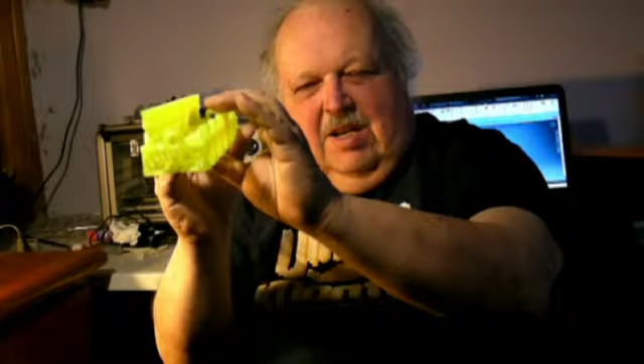And the rack we designed is something like... okay, here's the rack by itself. Let's put the light over here. Like this. It's a double rack because when you print in plastic there's some flex to it. It's designed to be bolted or used with something. That's what the things are on the bottom. And we also print it in one piece together with one of our frame pieces.

You can use it to climb, or when you do this, you reinforce it with something hexagonal, half inch hexagonal, either steel or aluminum, that goes into here and then gets held in place with some brackets. And you still have a little bit of flex here, that's why we didn't design a single rack, but a double rack where there's two pinions that hold from each side, so there is no deflection either way, and you're just going to have a straight pull down, and this will pick up a robot and probably more.

This particular piece is printed out of ABS, and we have quite a few of them that go into our system. Let's look at some of the basic layouts. I'm going to turn this off and move the camera.

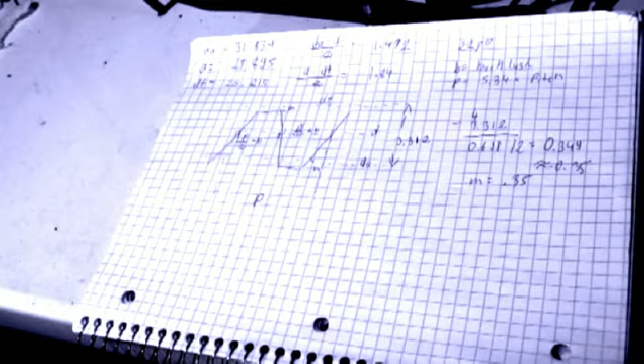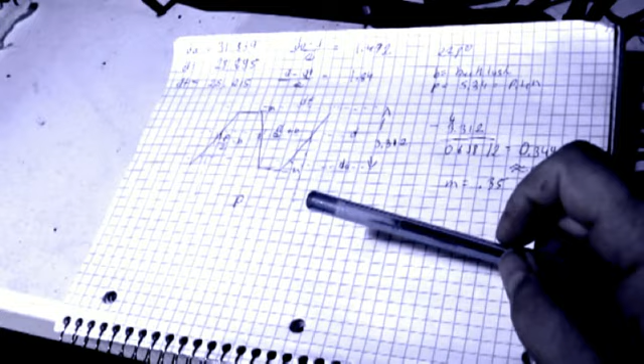Okay, we made a basic sketch here. If you look again at our rack, this whole thing is 267 millimeters long. Everything happens in our system at 26.7 millimeter increments. So for every 53.4 we have 10 teeth, 5 teeth for 26.7. That gives us a pitch length of 5.34 millimeters here.

So as we are working with our printer with the overprint, with a backlash of about 0.1, 0.2 on everything, we have this distance here 0.2 greater than this, so this is 5.34 divided by 2 minus 0.2, so that's 2.67, 2.47, and this is 2.87 to get the 5.34.

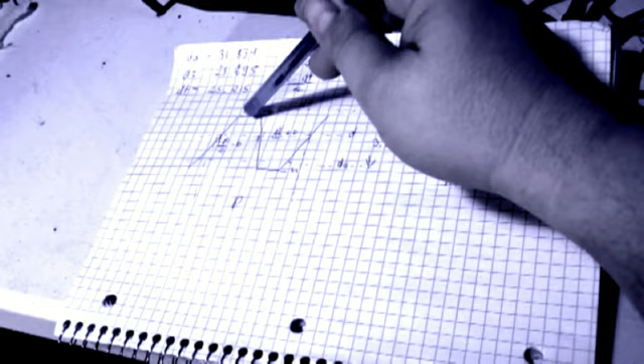Now we have DA, D and DF, which we get from Inventor. We'll show that later. D is the pitch circle, and DA and DF at the bottom and at the top of the teeth. We want to have a little gap here, which we calculated at about 0.35 millimeter, so we don't bottom out with the teeth, so we have nice, smooth and accurate running.

The calculated angle, which we get from Inventor, is 22.8. I'm not going into how to do it all with the math, or this is going to be a 5-hour video. Inventor does a lot for us, and the main intention of this is to go along with the kit. That means we have about 4 millimeters from top to bottom, which we're going to see in our drawing. We're going to have a line here of 22.8, and this here is roughly 0.2 millimeters longer than this.

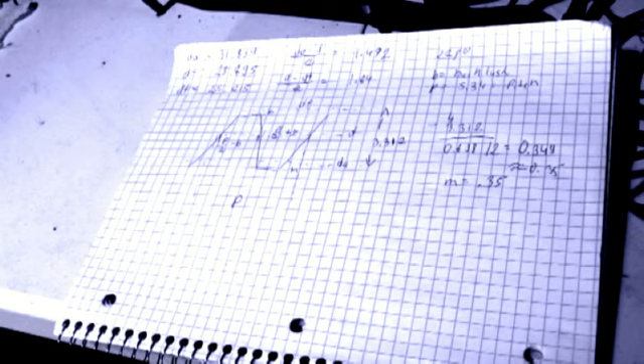Okay, so now let's look where we got the numbers from in Inventor. For those here we took the difference divided by 2 because we work with the radius. There's a 2 on each side, so those are the half sides. So you can go over this math if you want to. We're going to do some more when I edit it together with the video I captured directly from Inventor.

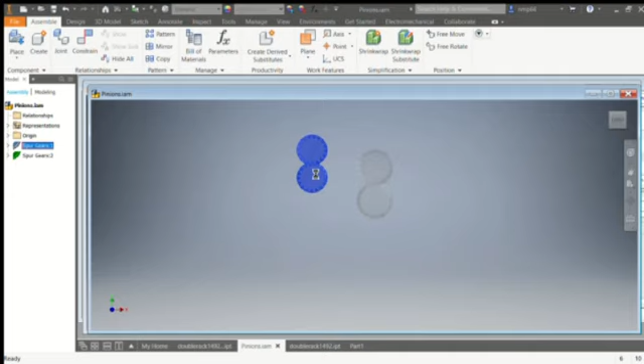Okay, we are in Inventor here, and we started off creating an assembly, I called it Pinions, and I created some gears. We decided on 17 tooth gears. What's going on here? And I decided on a 1-to-1 ratio because that makes it easier.

The center distance is 28.895. If you remember, we had 5.34 for the pitch length. If I multiply this times 17 and divide it by pi, I get the diameter of 28.895 millimeters.

Because we don't want an offset, if I just go in here and calculate the module, put in this center distance and hit calculate, I get 1.5 millimeters because Inventor rounds it up and it gives me a unit correction. That makes things more complicated, so we are not going to do that.

Okay, so you either can use a lot of math to get to it, or you just can play with the module to get the center distance, the desired center distance for this gear. Now if you look here, you have the measurements that we took down, the A, D and the F. The D is the important one, that is the circumference, the pitch circle, which has to match up with the rack. So again, we went

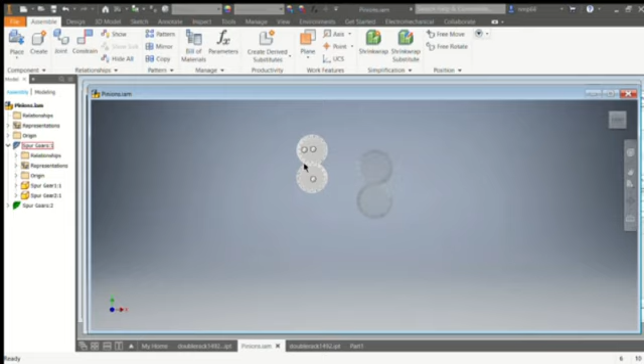So if we make a tooth in Inventor, you would right click on this. I make a gear. You would go to export the tooth shape. Okay, you would decide if it's the pinion or the gear. You would put in a backlash; you probably don't want a backlash, but you need a backlash because you have an overprint in the printer. For our printer, 0.2 is a good backlash. So you put this in here. Inventor does basically pretty much everything for you.

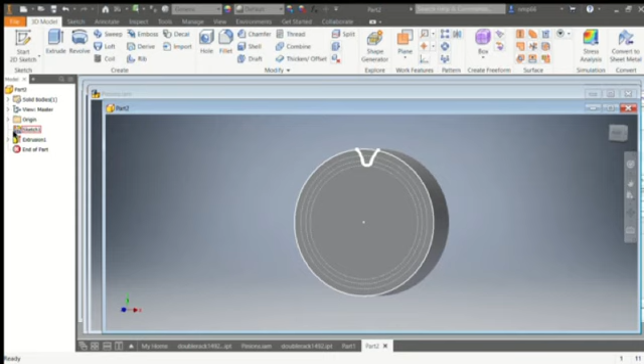Now you have the gear here, so I usually go into the sketch and just write it down and keep the outside diameter just so that I have a node on it, because I'm gonna need it in a circle. I then go and make a coil. I select the... I think I selected everything. Okay, coil. Let's turn this a bit more here.

Okay, then the axis would be the Z-axis, and the coil size would be the diameter, which is 31.839. 31 times pi times tan 60. It's actually the cotangent 30 because we want to have a 30-degree angle, and we gotta go here.

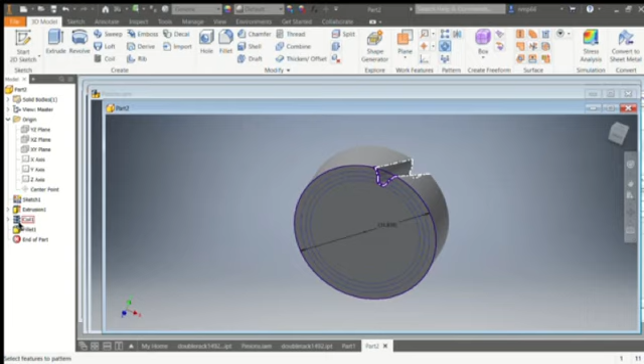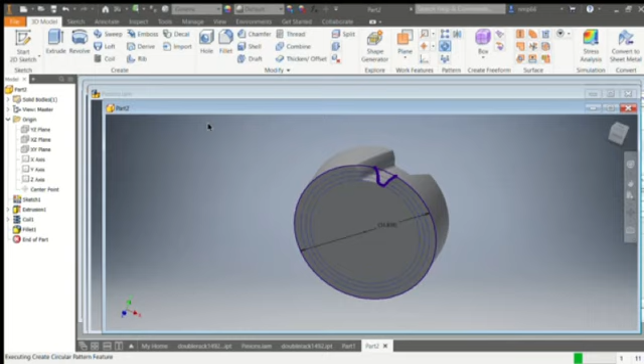So okay, and then you just go to a circular pattern. You select the coil and the fillet. You select the rotation axis, which is again the Z axis, and I think we had 17 teeth on this one here, and I did the typing wrong. Circular pattern, coil, fillet, Z axis, 17. Okay, that's better. And this is how you make a gear.

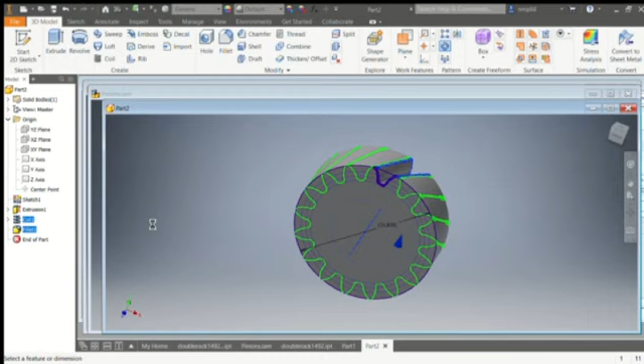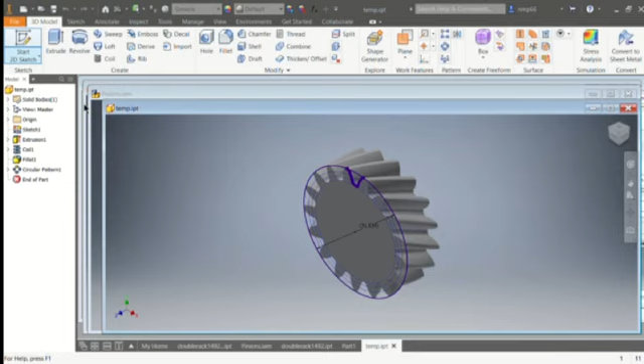Inventor takes a while doing that, and this computer is not so fast. Then to make the double helical gear, you just derive both gears. We can go over that too. Okay, file, save as, let's call it temp. Okay, now to make the finished gear, you just would make another new metric part, because we're printing, everything's got to be in millimeters. You go derive temp, okay,

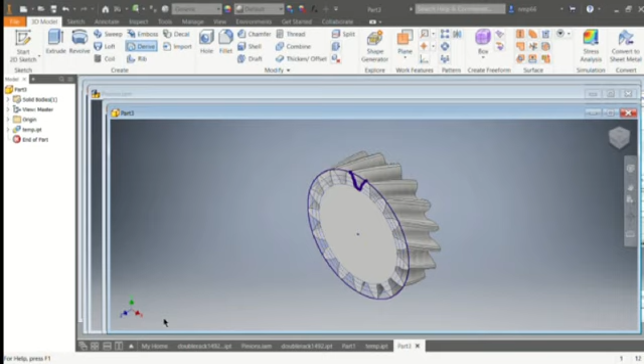and you derive it again. And you mirror it, and there you have your herringbone gear, and now you just combine those two, and you are ready to put some holes or something into this.

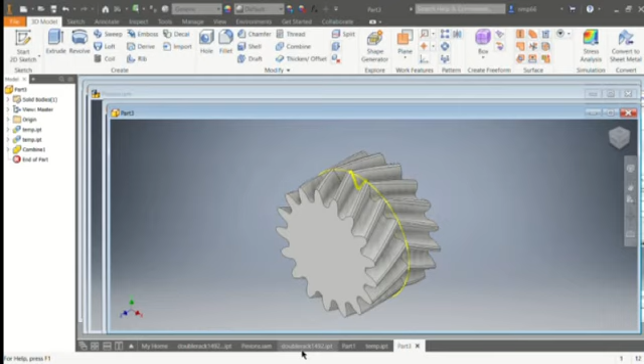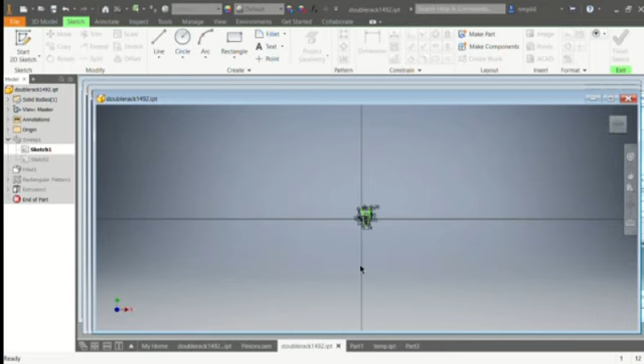Okay, so now let's look at the rack, which is this rack here. It's a little cumbersome and time consuming to draw, so that's why I'm just going to go with this. You draw a sketch, and you draw one tooth. We have the other tooth the opposite. Those are the measurements we just went over before. You have the 4 millimeters from top to top. You have the 6 millimeters here because we space them apart by 2 millimeters. You have again 4 millimeters from here to here.

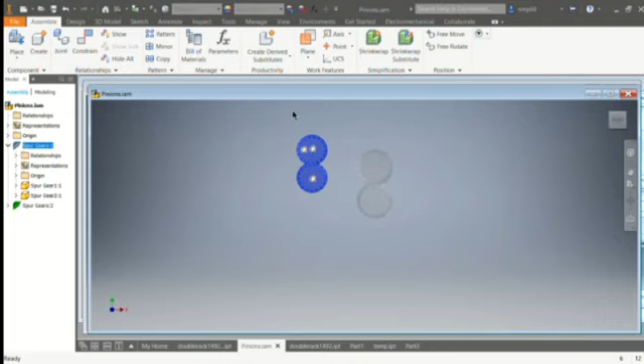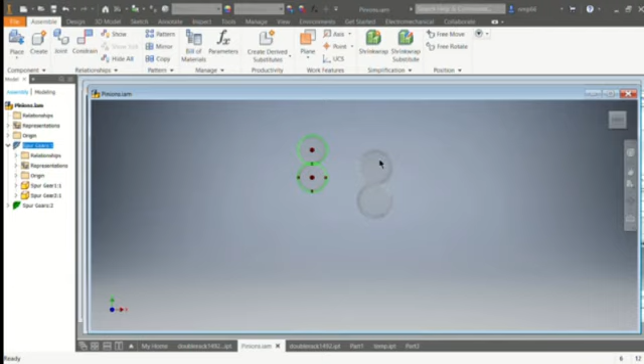You have the 22.8 degrees. If you remember, we looked at this here. It gives us the 22.7959, which is 22.8 degrees, which is the tangential pressure angle, the derived value here for this. So we are using this on the rack.

That's 22.8 degrees here, and this valley is bigger. That's why those up here are smaller than those down here, to take care of our overprint, because when we print, when it squishes the layers together, it pushes out a little bit here, and it's also pushing out a little bit here. This side here is this side here, and this side here is this side here. It's just on the other side.

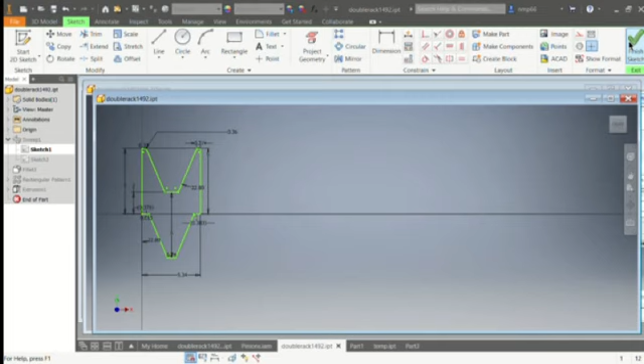So then after we basically draw this out based on the little freehand sketch that I showed earlier, we then on a different level draw our line.

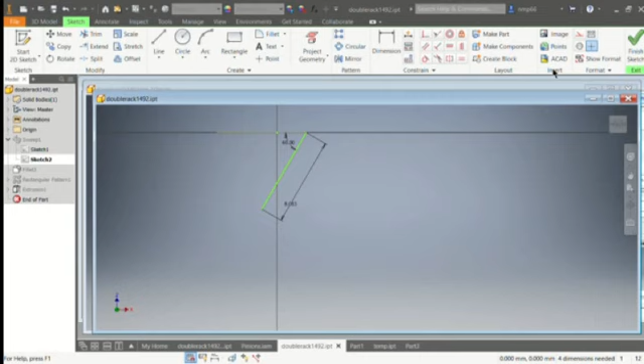We calculate using Pythagoras how long this line has to be for the length of our gear, which in this case comes out to 8.083. We want to have a 30-degree angle here, and then a 60-degree here, because this is a 30, 60, 90 triangle. Imagine a line here and here, and we start now.

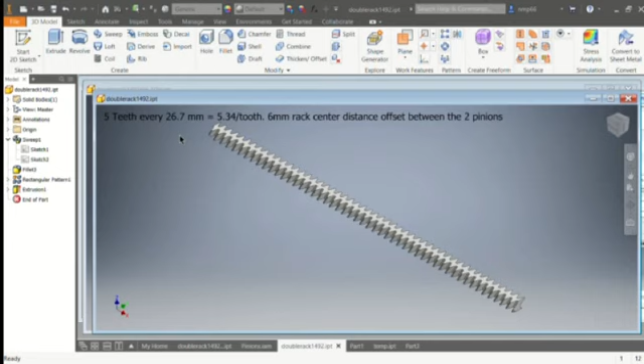We can make a sweep. If you look at the parameters of the sweep here, it's just a standard sweep which selects those two sketches, and we just create a sweep. Okay. Next thing is we are placing a fillet

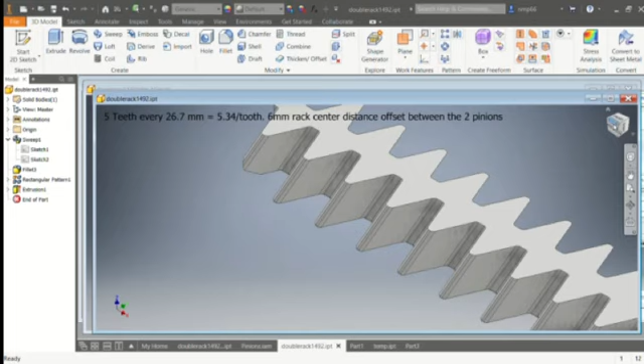on the side, so that at the end we don't have any sharp corners we need to clean up. This fillet is a very small fillet because that's all we can do. It's just here for the purpose of taking care of the overprint of the printer. If we would work with metal, we wouldn't need one. If we work with a printer, we have to make some adjustments based on the printer.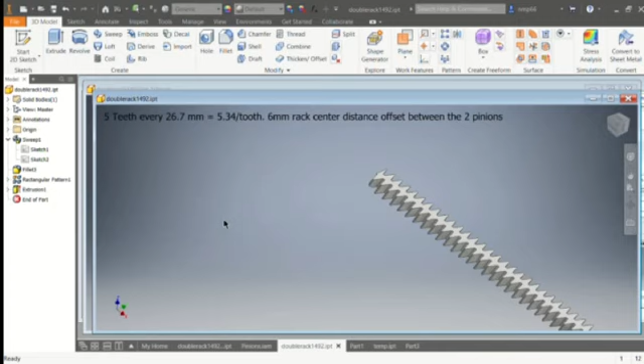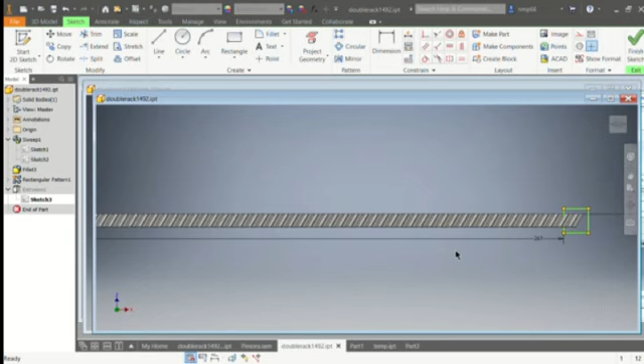So now that we have those, we then make a rectangular pattern. We made 52 at 5.34 millimeter spacing, and we are getting this whole line, and then the last extrusion we do is we cut off the ends to cut it down to the length that we want, so if you look, this one here is cut right at the beginning when it goes up,

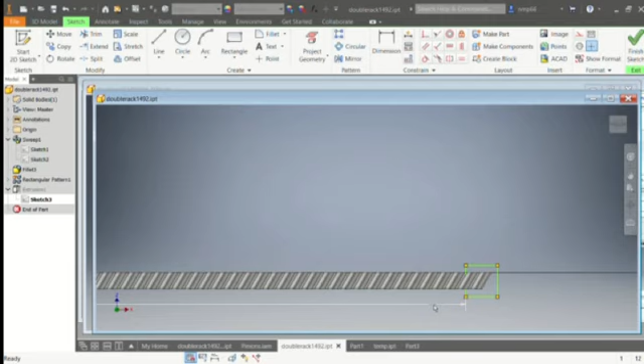and this line here is at the same position here, and here you have the 267 millimeters, which we want: 10 times 26.7 millimeters, what our bracket that we mount to is going to be. We cut those pieces off and we wind up with this piece.

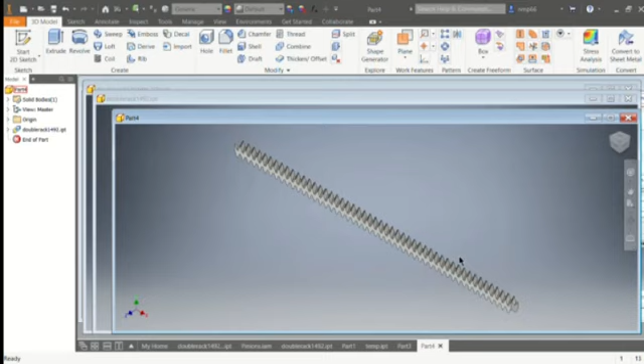Okay, now I create a new part, and again, like with the gears, I derive the double rack 1492. Then I derive it again, and I mirror it, and I combine.

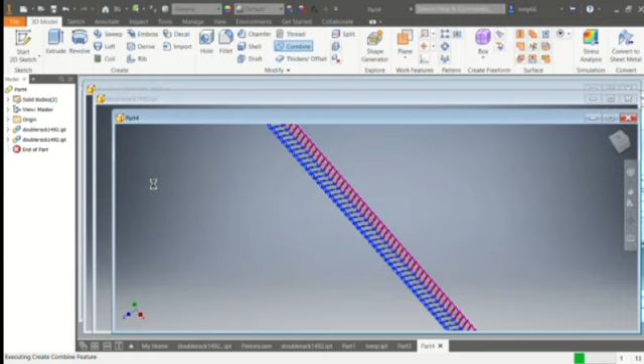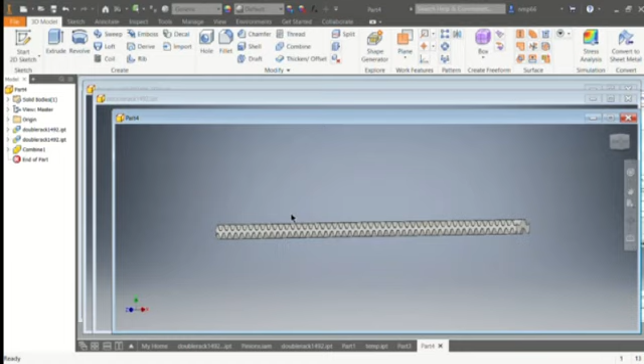So now I have my herringbone, double helical, or whatever you want to call it, double rack, and the gears are offset. That means if we want them on the same axle pressing together, it only works with odd numbered teeth. That's why we have a 17 tooth gear. So we just cancel. No, we don't want to save that. We already have that. Let's close this.

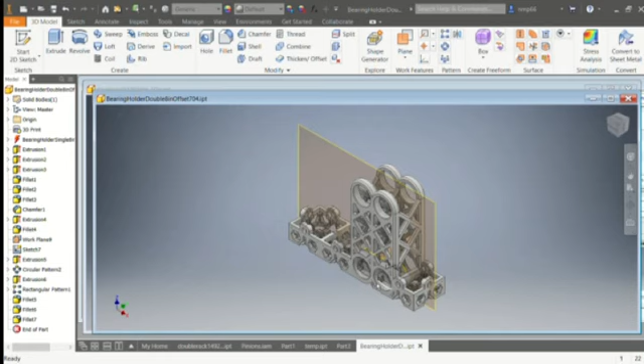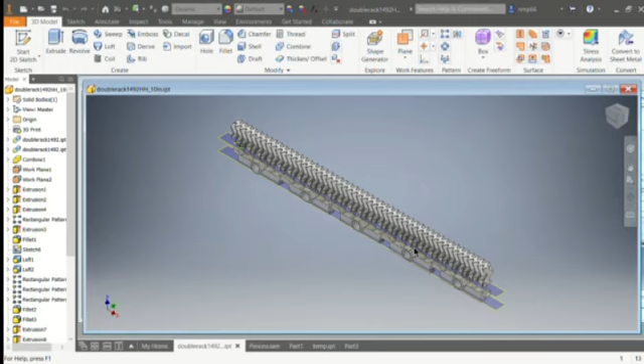So we then built this rack out of it, and we also made, that's not the one, this was an earlier version, but something to hold the bearings. Our current version, the big one. I just switched to Inventor 2019, so it has to convert some of the items. Looks like this. So you get a 1/8 inch bearing in here, 1/8 inch bearing in here.

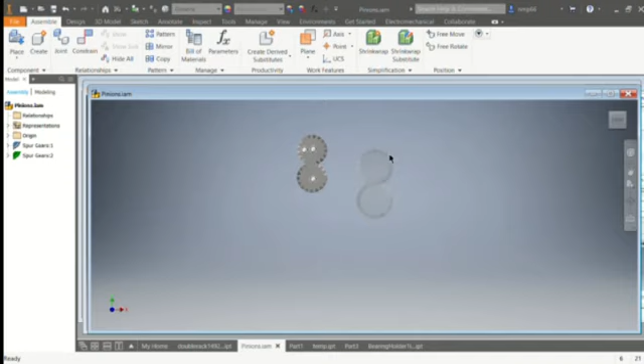Those are center spaced. If we look at the second gearing here, which has the bigger distance to line up with the bearings, which comes out to this pitch. We use the same number of teeth and come out with a new pitch, and in the end it looks like this.

So the rack goes between the two small gears, and the two big gears mesh with each other, so we only have to power one axle, and on the other axle, this gear then powers another gear that is next to it, like this. That is the mirror image of this gear printed, and on top this interacts with one side of the rack, the other gear next to it interacts with the other side of the rack, and now we have

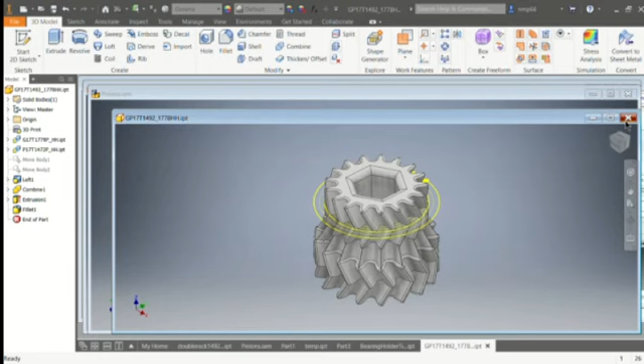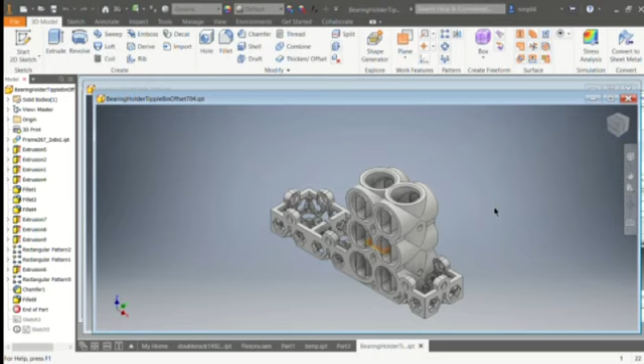this bracket where you can either mount two in here or two here and two here with a gear that reverses them and keeps them both moving. For heavy duty application, you have 4 gears engaging with the rack, and that will lift the robot. We also have just a smaller, basic 1-for-1, just one set of wheels.

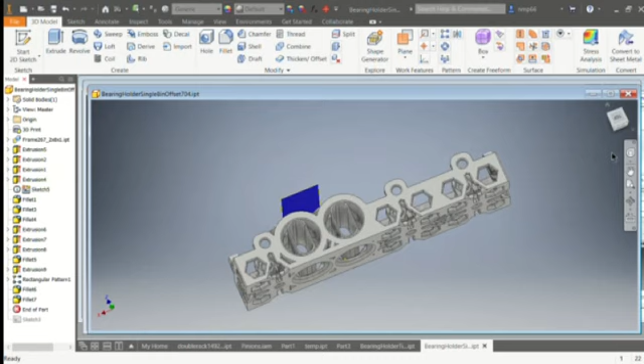This thing inside here is just a support for the arch, which gets broken off when it's 3D printed, and it gets cut out, and you see it's the same frame design that we have, so it becomes like a building block for us. Thank you.

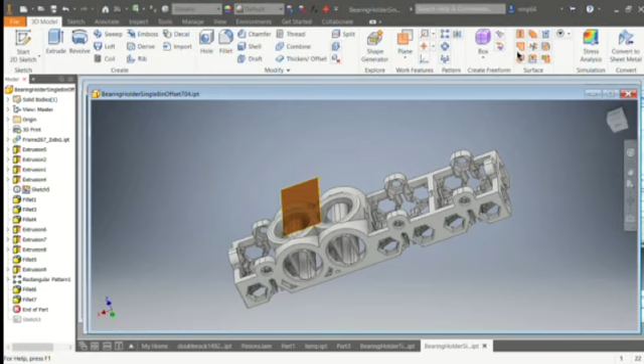I hope you found this little instructional video helpful for making rack and pinions with a 3D printer, something like this.